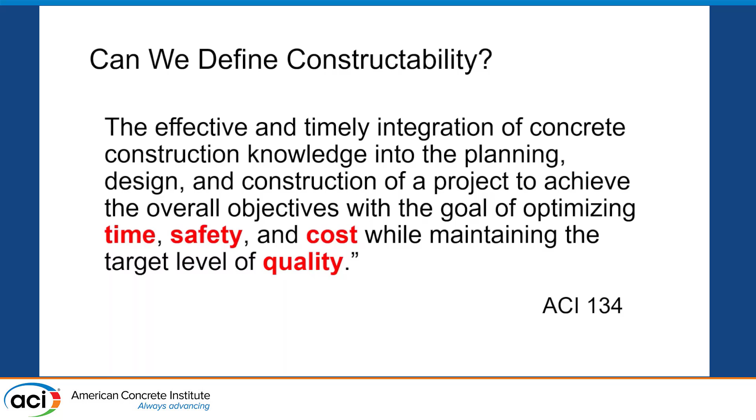That's a pretty broad range of stuff for any university to cover. So when I got this topic from Keela and I started looking, okay, how do we teach this here at ASU? And we really don't. You can't find a single course at ASU in our program that says constructability. You can't find a class in any one of our courses, I don't think—I didn't look at every one, I'll be honest with you—but you can't find a class that's entitled Constructability. Yet it's woven into every class in much the same way that we teach ethics across the curriculum, because ethics shows up everywhere.

And what we find is, go back to look at time, quality, cost—all those things are woven through any construction program. Unfortunately they're not as woven through civil engineering programs for you guys on the civil side, and I think that's part of our issue. But we have to teach that constructability everywhere it shows up, whether it's an estimating class or a scheduling class, or in my class, I teach it in structures. I have a structures class where the whole idea is to educate our construction management students so they can hold an intelligent conversation with the structural engineer on the job. Just like Mike was talking about going out there and talking to the structural engineer, I want to make sure that our guys, when they go out the door, know that structural engineer is not the enemy, all right? But he's another team member.

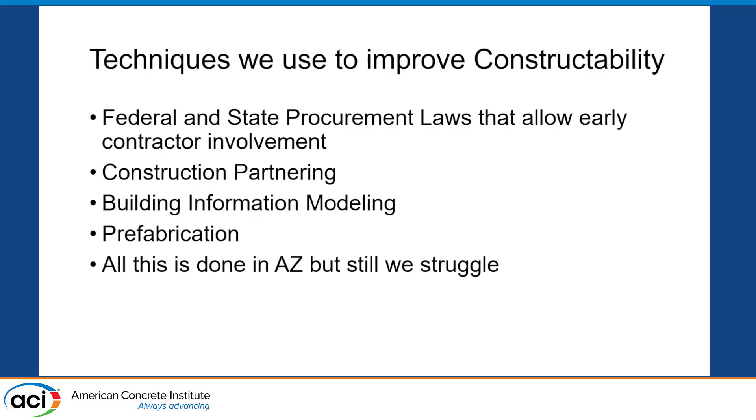And those kind of things will continue to happen if we don't have more discussion of this kind of stuff. I've reached out and brought in a few examples from our students that have brought constructability issues back to me based on our classroom discussion and our people going out in the field. I wanted to share a few of them with you.

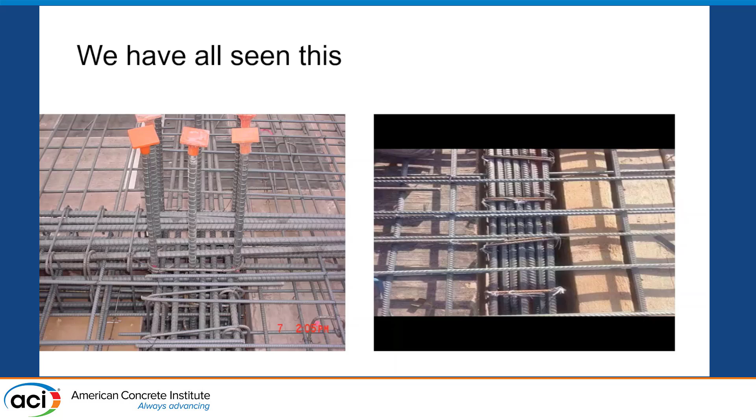The first one is a grade school that we built in Phoenix about 10 years ago, Monte Vista Grade School. The issue is jointing and subsequent cracking that comes from jointing. That was the topic of this one.

The backstory, and this is a fascinating backstory, at least I find it anyway, I hope you do too. The contractor was contracted to demolish an existing school and rebuild it from the ground up on the property. So knock it down and rebuild it.

The current school principal, they're in the design phase. This is a CM job, so everybody's in the same boat working together. The current school principal was a student at that school back in the 1960s when it was originally still a school, and they had planted a tree on the property, which is now 40 years old, way up tall. The principal would like to salvage that tree as part of it.

So what does the project architect do? He's going to do everything it is possible to satisfy the owner, right? That's very standard, it's what we do, right? Can't save the tree, there's going to be a building in the way. It's just to work around it, can't save the tree. So what does the...

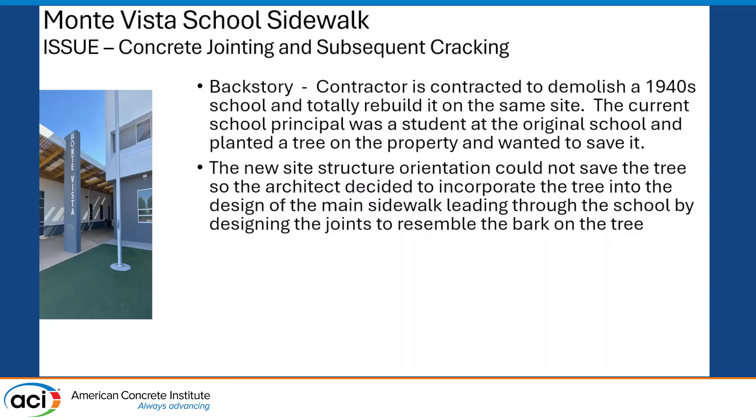architect decide to do then? He decides to incorporate the tree into this main sidewalk that walks down the middle, and he's going to do that by making the joints in the concrete sidewalk look like the bark of the tree. You know where I'm going with this now, don't you? That's what the original design came out looking like.

How would you like that, Mike? And I'm not making this up, this was real life. That's what the architect said: yeah, let's make the joints look just like that.

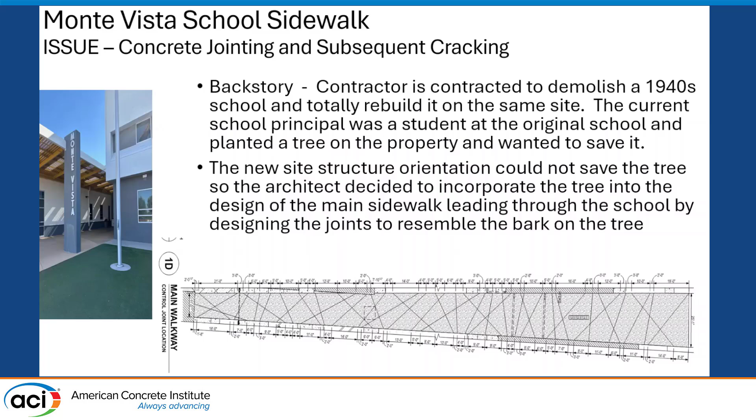So recognized the problem, called a meeting of everybody concerned, all the way from the owner all the way down to the concrete finisher, and said let's do something different. We came jointly to a plan, pun intended, on how can we make this look a little different. And it ended up looking like that.

This thing is about 170 feet long, anywhere from 12 to 15, 20 feet in diameter and width, going all the way down there. And you can see them actually finishing it. It was a colored concrete. They recommended let's put some fiber in there to help with that, since there will be the possibility of cracking. And that was it going in.

And sadly, 2 years later, at the end of the warranty period, what do you think happened? Even with putting in fewer joints to make it look a certain way, it cracked. There was cracking involved.

So the contractor, the GC in this case, took it out at his expense, paid the concrete finishing subcontractor, re-put it back in, and they put it back in a similar fashion there, again with some slightly different changes, a little higher dosage rate of fibers and a few other things. But he incurred that cost because he wanted to maintain the relationship with the school district and build more schools.

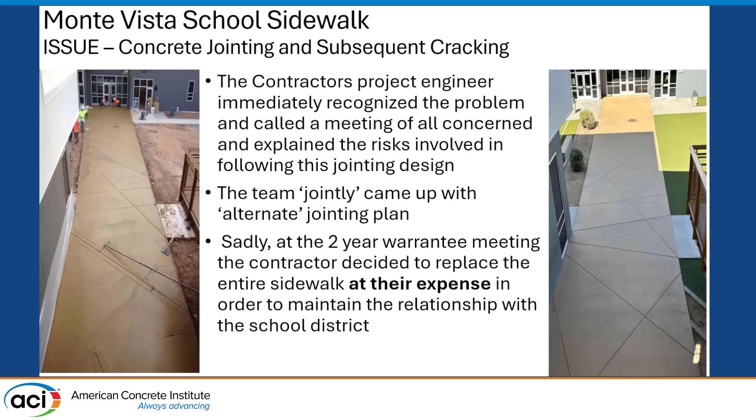So a few lessons there is you got to be careful. And not to mention, Mike, what does it cost to run a foot of saw cutting? A couple dollars per foot, maybe. So by the time you add all that in, you're adding some more cost as well. Not to mention the $20,000 or so it costs to replace all the sidewalk 2 years later.

So a couple other ones. All right, this is another one. This was a post-tensioning failure problem, a little more expensive than the previous one. This was a 3-story luxury apartment in the Phoenix area. It was a post-tension concrete podium with some wood framing above it. Our graduate in this situation was a civil engineer, actually, guys, employee of the ready-mix producer, so not directly involved in the issue, but nevertheless got splashed with the cost.

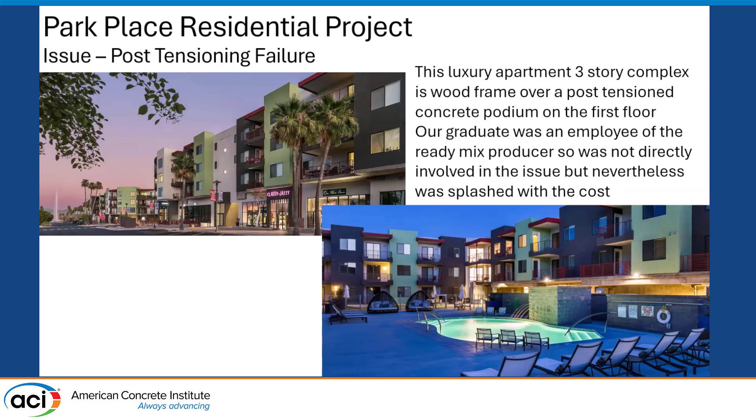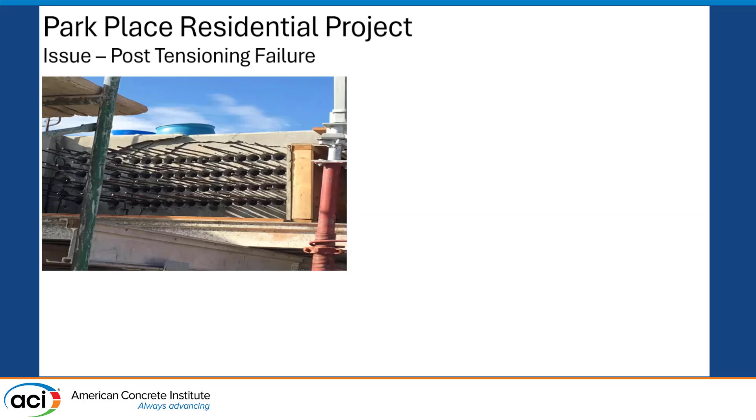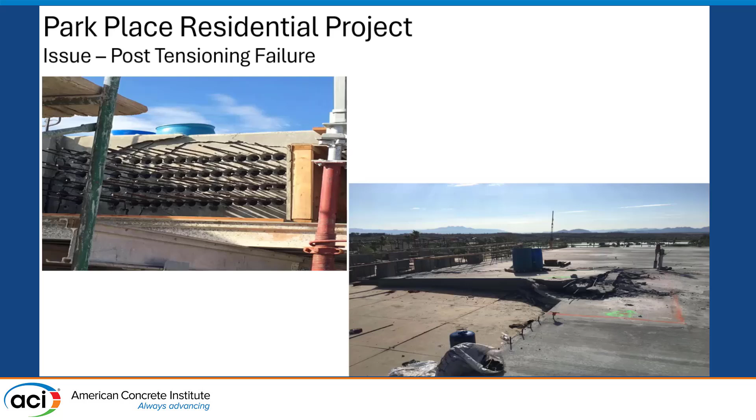I got that degree in structural engineering, but I never designed any of this. But I've seen enough of them to say, man, that's pretty heavy, okay? And when they stressed it, that happened, okay? So that's what occurred. Now, that's just a situation where it's hard to find out what happened here, because nobody will talk. They did repair that cost, okay? Maybe it was constructability related, maybe it wasn't. Somebody probably should have raised their hand and said, this is an issue with getting in, I would think. But I do know that it cost around $500,000 to fix that one. That was a little more expensive to fix and go back in.

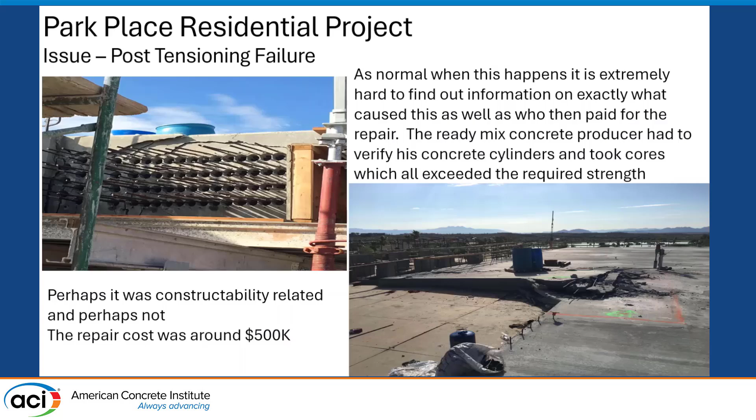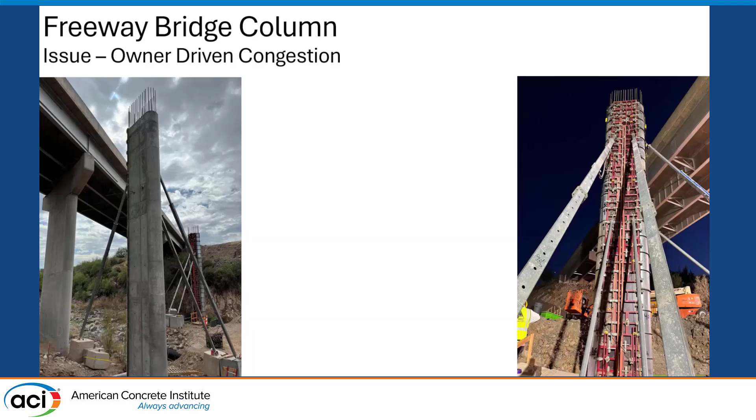So sometime, again, might not have been a constructability issue, but certainly was part of the communications which could have solved that problem had they not done that. All right, let's go back to communications again and constructability related. This one is definitely owner-driven congestion, okay? Mike, we talked about this a little bit in yours as well. There are some columns on a highway bridge, on a freeway bridge in Arizona, all right?

45-foot tall columns, part of a widening project here in town, in Arizona right now. And the project was mandated by the owner to match the existing columns, which is on the left-hand side. You can see the existing columns. They were cast 40 years ago. It's out in the middle of the desert in Arizona. Why they exactly had to match it is beyond me, but that's what the owner wanted. They wanted it high. And it's interesting, the existing columns were cast in 2 lifts. And it was very clear, you can see a construction joint there about halfway up.

For some reason, again, to me unknown, because I could not get the owner to respond, the owner would not allow the 2-lift method to be done. They wanted all 45 feet cast in one. The concrete in there was not, the steel was not terribly congested, I'll be honest with you, in the column. It wasn't a terrible congestion issue. Just the height issue was the problem.

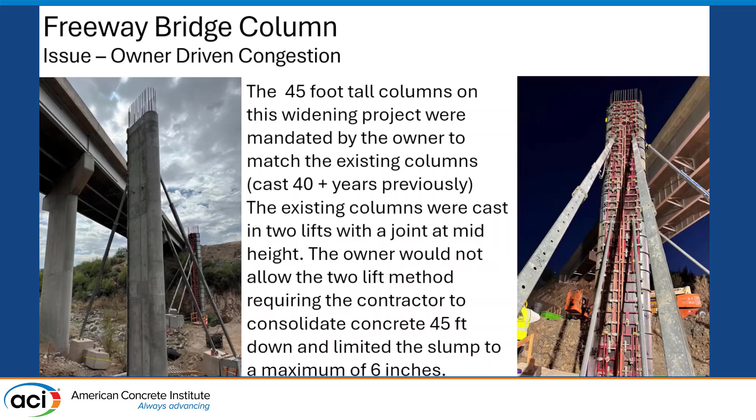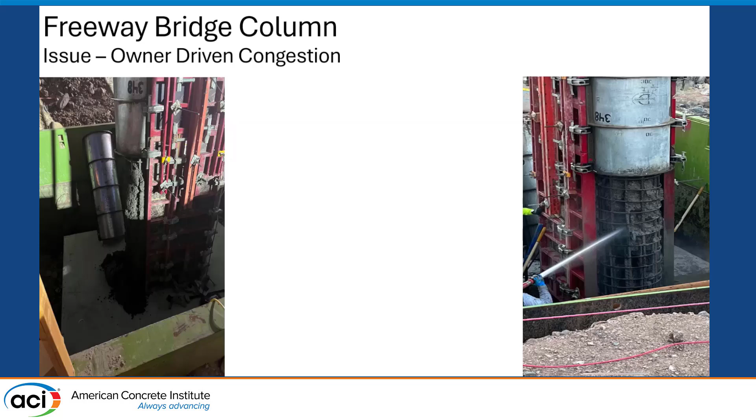Mandating that, plus the fact that the owner's spec said maximum slump of 6 inches. Now, 6-inch slump concrete can still be kind of stiff. So what you can see is where this struggled, and this is what they got. The first one they went down in, when they got down in, and now we're looking at the bottom of the column. They got the first truck in there. Actually, the first truck came out at only about 4.5 inches slump. So the contractor admitted they probably shouldn't have used that, but they did. And they stopped after, and the other issue that came into play was the contractor had vibrating whips with only 35 feet of length.

All right, so 35 feet of length, you can do the math here, guys. Even construction guys can, right? That leaves us about 10 feet short of being able to reach the bottom of that.

They couldn't put external vibrators on it because they were concerned about vibrating the forms at the bottom. They were renting the forms, and I think, correct me if I'm wrong, Mike, but I think most of your companies will invalidate what's going on if you use external vibrators on their stuff. I think PERI was the folks that was providing that.

So they took it out after the first truck, and they got concrete vibrators stuck in there. They got down there and couldn't get them out. So what do you do when that happens? You run another one down to loosen it up, right? And then what happens when that one gets stuck? All right, they got 2 stuck, and they managed to get it out with the third one.

And then, again, being contractors, they came up with a very unique situation. Mike, you've probably faced this before, but how do you do that now? You got more columns you got to fit down here. They actually took a piece of PVC pipe, cut it a little over halfway around, slid that all the way down, and then ran your vibrator down inside that to protect it from getting caught.

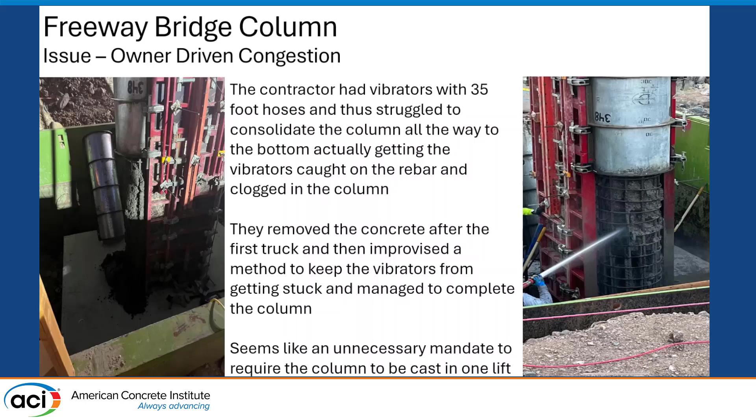Why would a construction joint bother anybody? You're out in the middle of the desert. There's not a person living within 20 miles of that bridge. But that's what the DOT wanted to do. So it's a people business. You got to work with that.

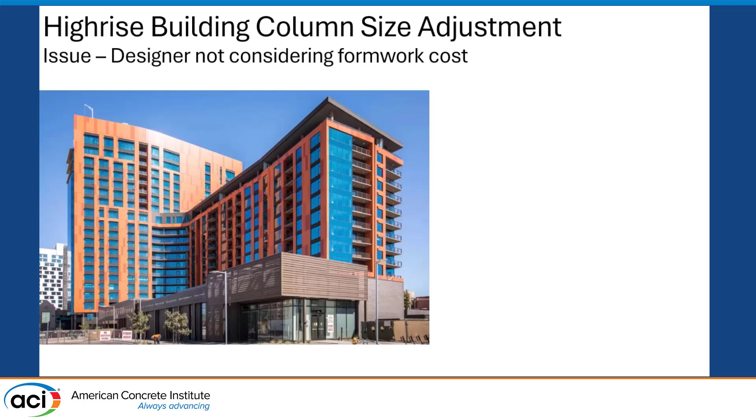Mike already covered this one twice, I think, but we have this exact same issue. Just to show you, it shows up just about everywhere. 22-story building on one side, 15 stories on the other. The issue was column size adjustment.

When the building was originally designed, this is kind of a unique building—a senior living facility with healthcare attachment right on Arizona State campus. The design specifically says come retire here and you can use all the university facilities as part of your operations. And oh, by the way, our development office will get a hold of you shortly after you get here. And it has worked—we've already had a major donation come from people that live there.

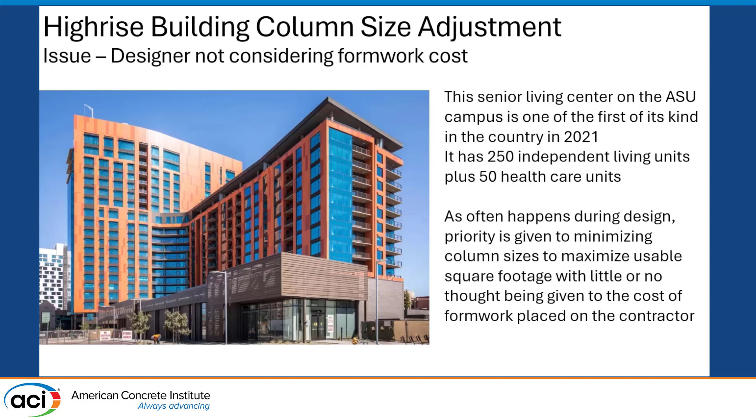But anyway, back to constructability. During the design, priority is often given to you structural engineers. We got to maintain costs. We want those columns to be just as small as possible because a column is not rentable space. I got to have floor space, and I can't rent a column to you, I can rent floor space. So we want to maximize that, which means we're going to make those columns the same size, as small as we possibly can. In this particular case, it was a CM job.

The first column design came out with 32 different column sizes—not nearly as bad as Mike was explaining, but 32 is 32. And the contractor sat down with that and got it down to 14. They didn't share how much money it saved, and I didn't bother asking.

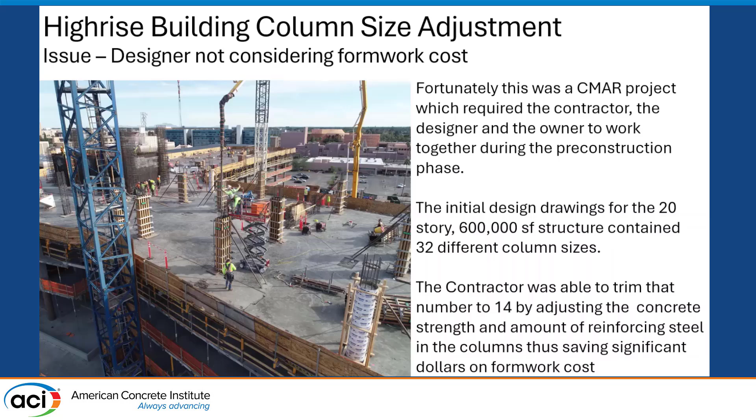But significant on those, because most structural engineers in the room—have you had any classes on formwork and formwork cost and those kind of things? Of course not, all right? It's just F prime C, and what's that? Phi Mn, right? That's the thing. Phi Mn bigger than Mu, that's what you got to do. You got to make sure capacity is bigger than actual, right? That's the whole rule. If you've done that, you go to sleep at night and you're just fine. You don't worry about those other things. Well, we need to think about those other things, all right?

So that's number 3, the last one, and I'll get out of your hair. This is right around campus. This one in particular, I show to our students every year. This is one we did where there were problems we didn't fix as a contractor, and we should have, and I'll blame the contractor for that.

Nice long sidewalk there. You see that road going down? It's about 12, 15 feet wide as a service road right next to our building on campus, and you can see things that we just didn't fix.

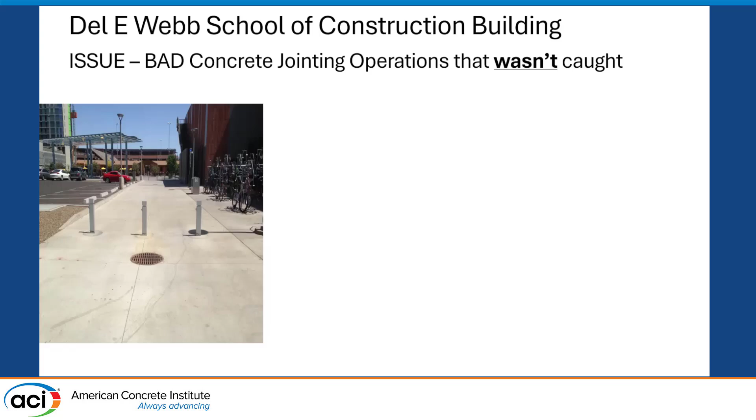All right, so we all know concrete shrinks when it cures, right? And it shrinks, and we know that cracks will occur due to shrinkage. That's the primary thing. Shrinkage plus restraint gives us cracks. That's why we tool joints, that's why we saw cut joints. We want to create that weakened plane, right? So that's the whole reason why we do it, so we don't have cracks and we have nice lines.

Okay, so look down that sidewalk, ladies and gentlemen, and you will see what? Because I don't think our team understood that on this job. So you look at that driveway, and there's 3 bollards in the middle to keep traffic from going down there. In each case, we've drilled out, formed out, a 2-foot hole.

That driveway is going to try to shrink primarily in its longitudinal length. So where's the weakened plane there, guys? Weakened plane would be right between all those 3 bollard holes, wouldn't it? Because that's where the material is gone. We're asking the concrete to shrink around each one of those holes. Wouldn't it make sense to put a joint there?

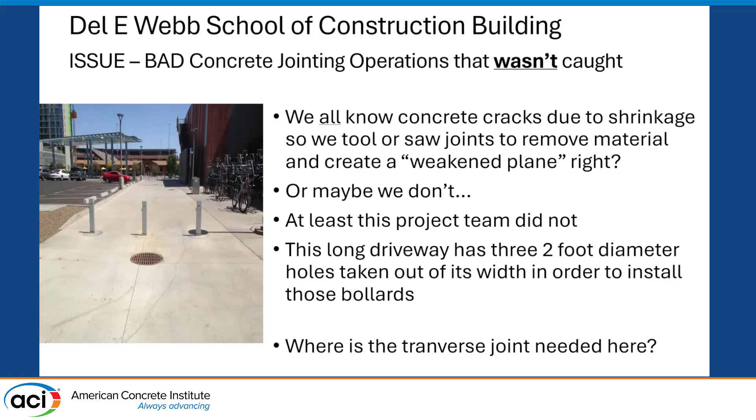That would be right there, and then put your joints anywhere else you want, and space them out at your 20 feet, whatever your methodology is, engineers, for figuring that out. There's crack number 1, there's crack number 2, there's crack number 3. I've highlighted them with a black magic marker, and there's crack number 4.

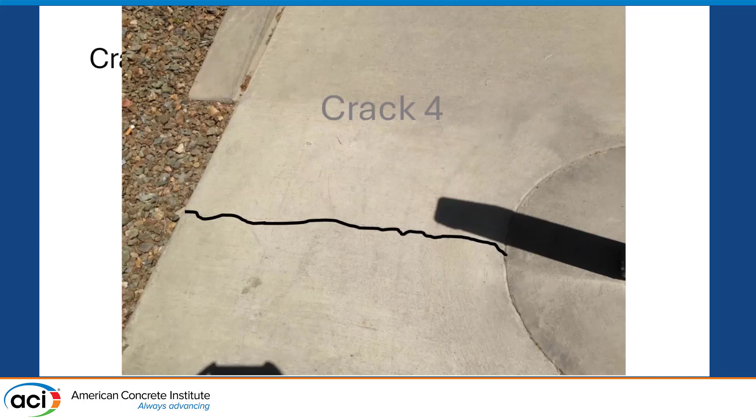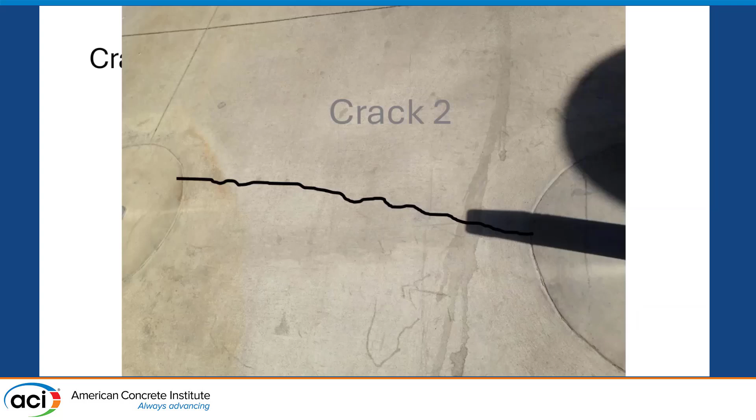Perfect, and the worst part about it is, you go back and look at crack number 2, there's a joint about 1.5 feet away from it. Why couldn't we have put that joint right between them? Wouldn't that make more sense, and hide all those cracks? Now, the building's not falling down, and the cracks aren't terribly displaced, so no big issue, right? But how easy would it have been to do it differently, okay?

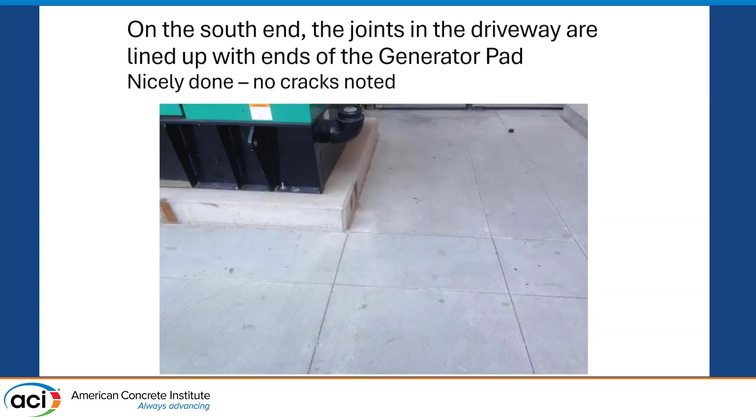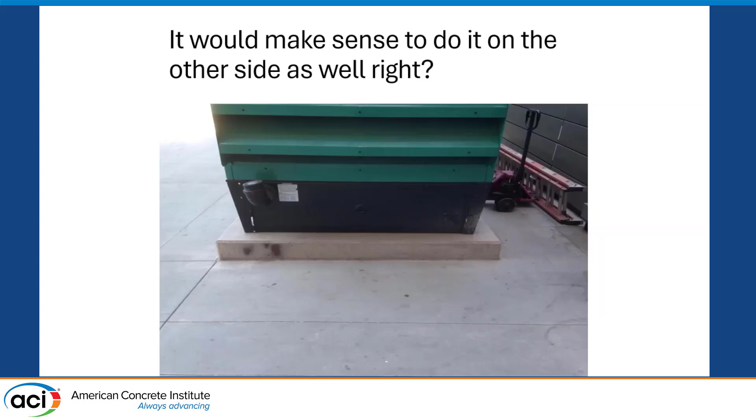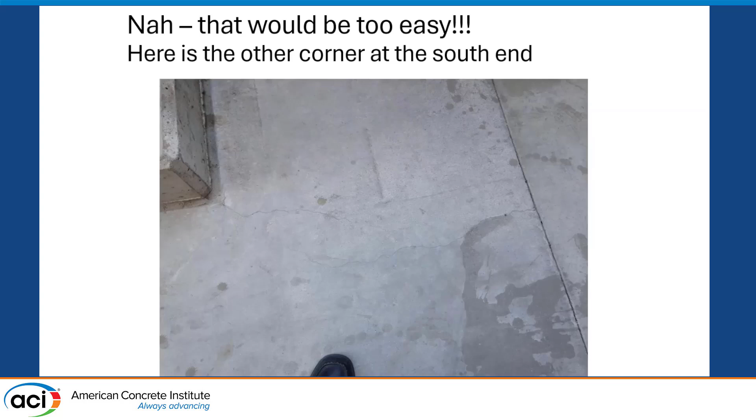You would think it would make sense to do it on the other side too, wouldn't it? No? Okay, so you look at the other side, and what do you see? Shouldn't we have a joint right there? Wouldn't that make sense? No, it's too easy. Look where we asked the concrete just to shrink around that corner for us, guys. It doesn't, okay? So we get a crack.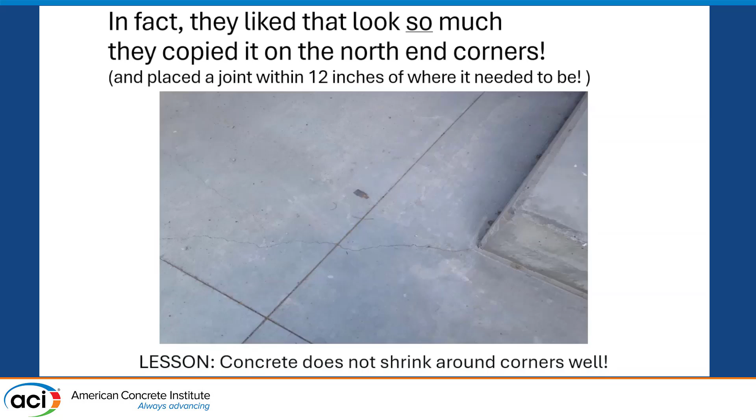I've talked to the folks down there that give their presentation, and I asked, does the architecture school ever bring their students down here? Nah. We've never seen an architecture class in our building, is what they've told me. This is the largest architecture firm in the state of Arizona, and never had an architecture class come down. I'm saying, we got something wrong with that system if we can't do that.

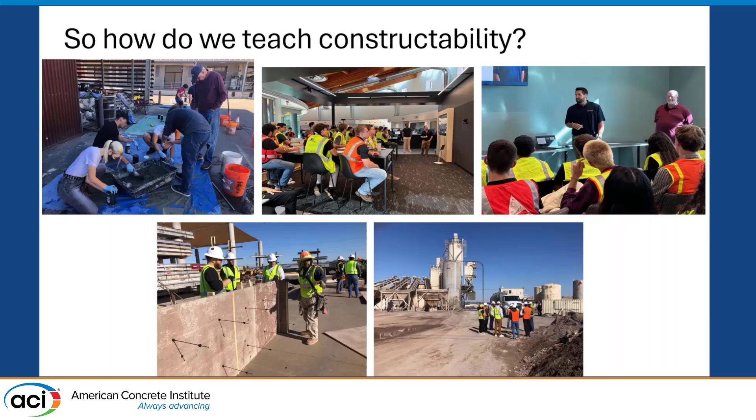And that is how we teach constructability. That's all we've got - more industry interaction. That's what we need.

And I'll say this right now - I bashed the engineering and the architecture programs. There are challenges there, there's a cultural challenge there that we have to solve. They don't get, engineering especially, they don't get rewarded for taking students to the field. They get rewarded for doing research and publishing papers - that's what you guys get rewarded for. I understand that. How do we solve that problem? How can we help that problem?

Because we end up with faculty coming into our programs with zero construction experience. And how do we solve that? They can't bring constructability to the table if they have never done it.

One of the things ACI could change, I think would help, would be if the foundation created a model like AGC does. AGC has a foundation set up to pay for a faculty member to go work in the summer for a school, at an industry company like Baker. They'll pay a third of the cost, the school will pay a third of the cost, and let the university work out the system there. They have those kinds of things available.

That would help our constructability by getting it started now at the early ages for those engineers, because right now we don't have that available. It's not all the students' fault, but it has to be encouraged. We mandate it in the construction programs, but students have to take it on themselves in architecture and engineering to make it happen. And I think too often there's not enough encouragement there. And I'm done.